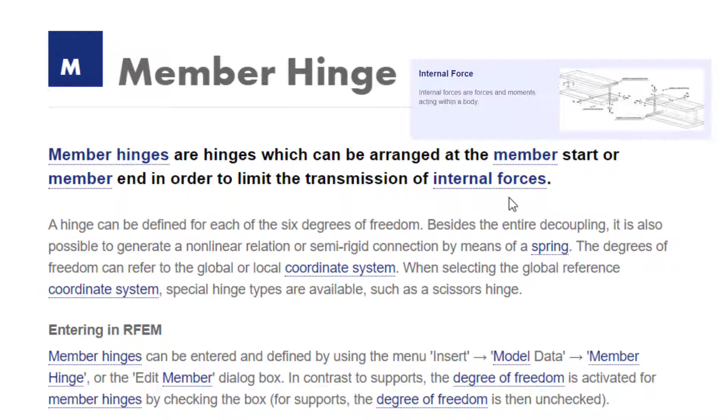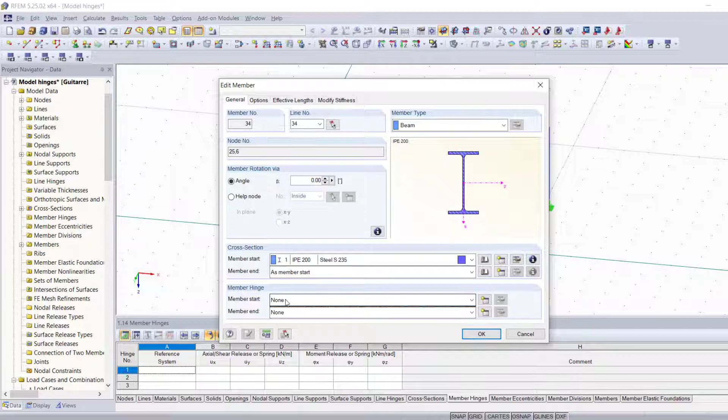The first one, which is probably the easiest and simplest way to add a hinge to any member in your structure, is double clicking on it and changing its properties so that it has a hinge at one of its ends. Now before I do that, I want you guys to look at this red arrow right here and memorize the member orientation, because it tells you that this member starts from the left side and ends at the right side. Now when I double click, you're going to notice that for the member start you have this field right here and you have one for the member end as well.

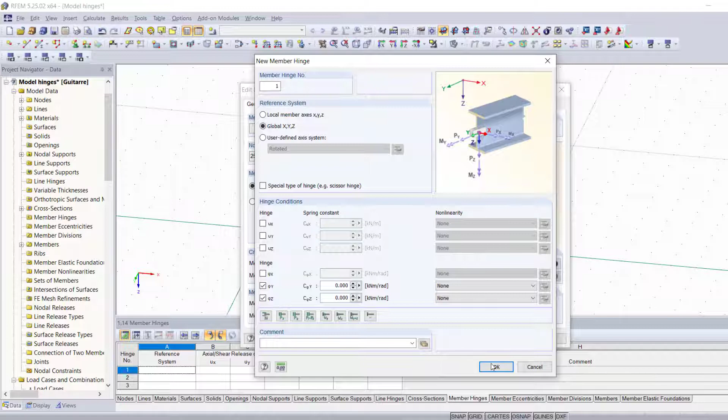So I'm going to go ahead and create a new hinge for the member start. We're going to define it according to the global coordinate system, and we're going to activate these degrees of freedom, which just happen to be activated by default because it's the most common type of hinges used in RFEM. We're going to activate the degrees of freedom, the rotation around the y-axis and the rotation around the z-axis. And we're going to go ahead and click on OK, which immediately adds this new type of hinge to our list. Now that we added it to the member start, we can simply choose it for the member end.

And we validate by clicking on OK. And now you notice these white circles right here that indicate that we now have successfully added a hinge on both sides of our member.

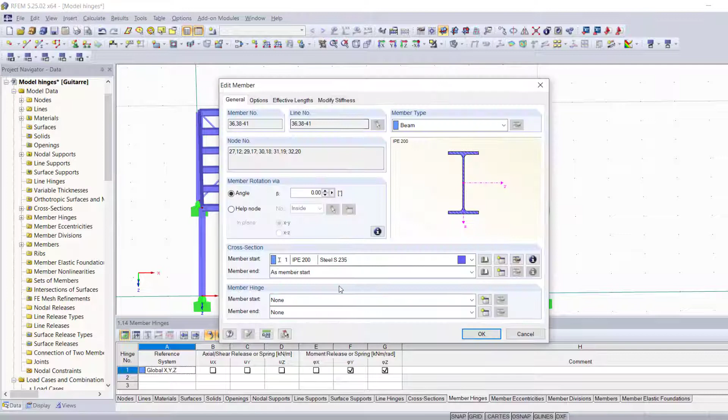Now before I show you the second method, I just want you guys to know that in RFEM you can select more than one member. And when you double click and edit this kind of properties, it actually changes the properties for all the members that you've selected. And now you see that we have hinges on both sides of each one of these parallel members.

Now the second method is one that I personally like a lot, because it's very useful when it comes to adding hinges to different members located in different spots in your structure. That is inserting the member hinge graphically. We're going to go ahead and click on Insert, Model Data, Member Hinge, and select Assign to Members graphically. The first major step of this method is choosing the type of member hinge that you want to assign graphically to your members. We're going to go ahead and choose the same type and hit OK.

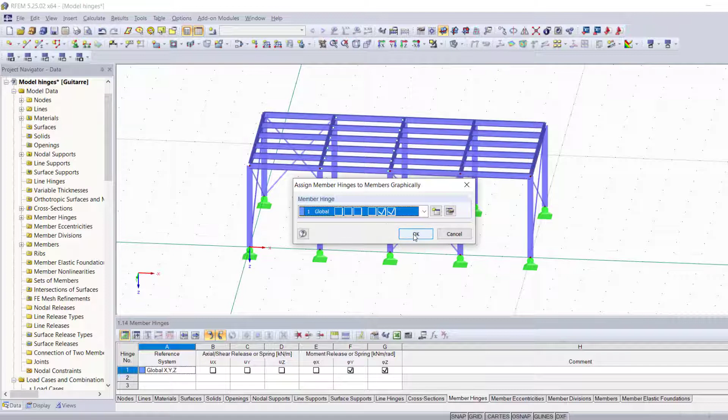Now when you do that, you realize what RFEM basically does with these blue dots right here is divide each and every member of your structure into three parts. Now let's take this member right here as an example. When I hover over this member, you're going to notice that the selection suggested by RFEM depends on the location of the cursor and which one of these three parts the cursor is actually on, which basically means I can graphically choose where to assign my hinges.

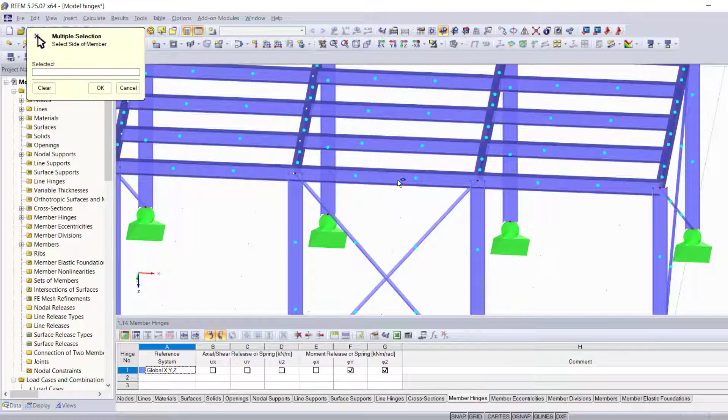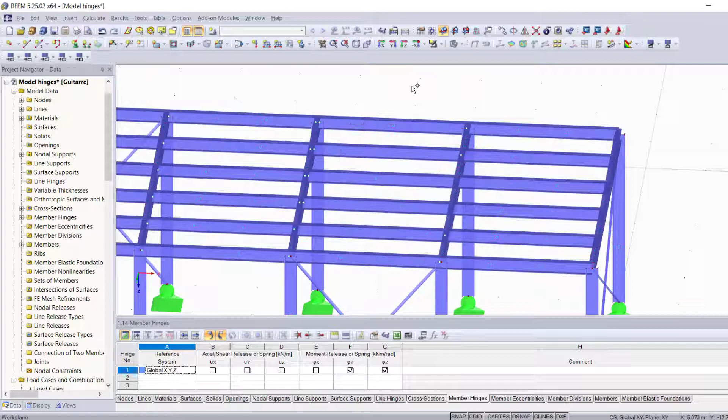Let's say I want to add single hinges on the right side for these two members and on the left side for the next two, and just to try things out on both sides for these last two members. And I'm going to go ahead and hit enter to confirm. Now what you see happen here is we have hinges only on this side for these two members, on this side for these two, and on both sides for these last two members.

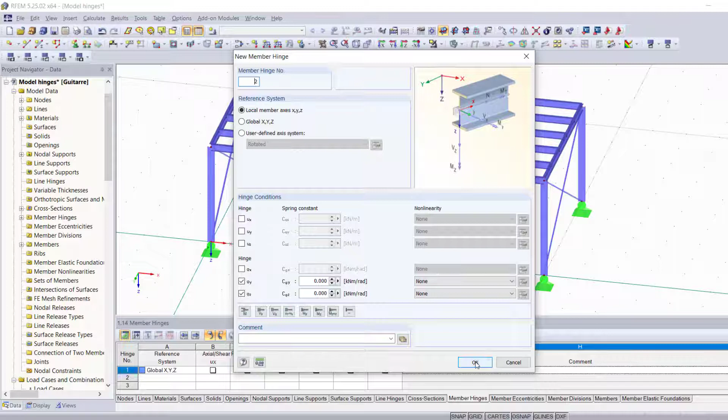The other two methods that I'm going to show you are defining the member hinge through the dialog box before assigning it to any member, which makes it appear as a blue line here at the table. And then you're going to be able to find it in the list of member hinges when you select a member.

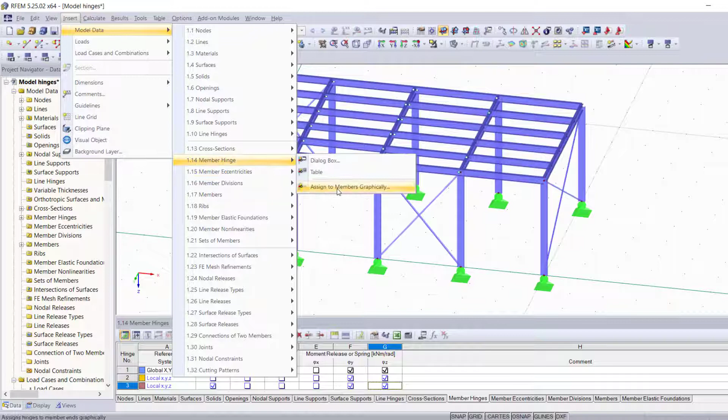And the last method would be adding it through the table, which basically means you're going to have to change your hinges properties manually until you get the type of hinge you want. And then of course you're going to be able to assign it in any way you want. You can also assign it graphically. Let's choose the type number 3, and as you can see, you can always choose that type of hinge for any members in your structure.